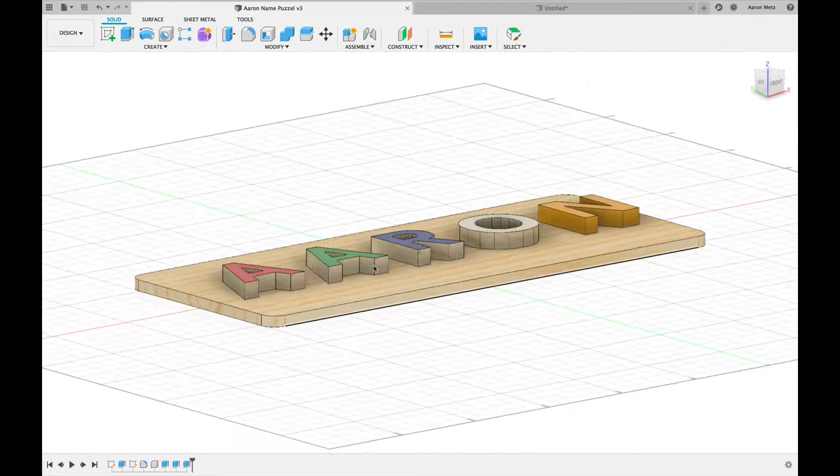Okay, designers, today we're going to look at how to create this simple name puzzle in Fusion 360. So ultimately, we're looking to output something like this.

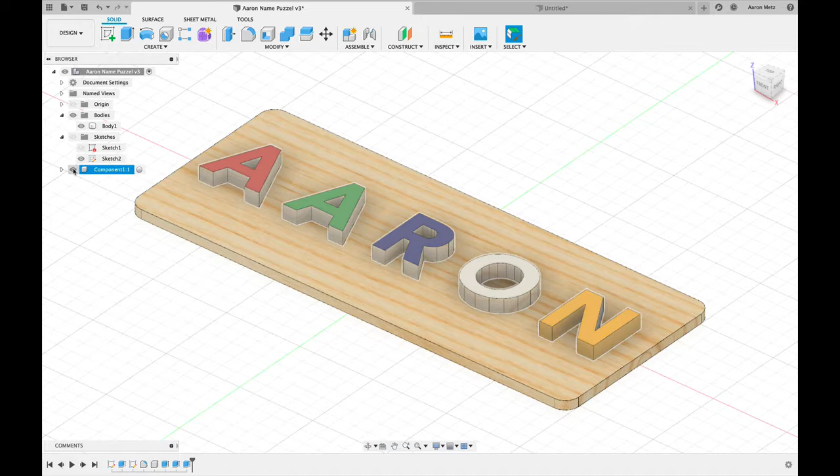If we look at it a little bit closer, we can see in the browser here that this model is made up of a component, which in this case is the actual letters. It's also made up of a baseboard where an outline of the letters has been recessed into the wood, allowing the learner to place the letters in the space. So let's look at how to create this.

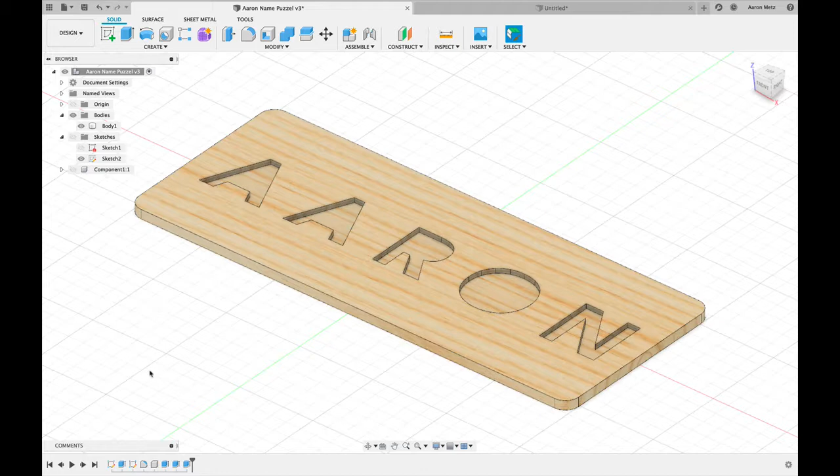Let's dive in. So I'm in a new sketch and I'm going to sketch here on the floor, as we like to say, and use a center rectangle.

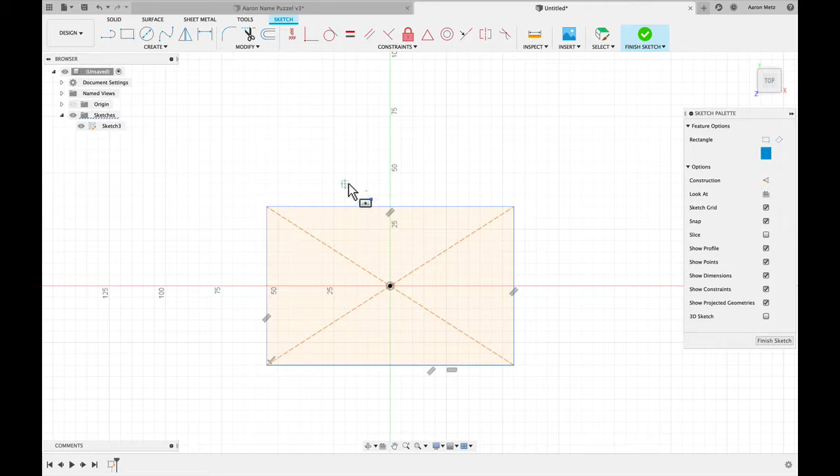Starting from the origin, I'll click D for dimension. You can see here that I am going to set the dimensions after the fact, using the dimension tool to do that. It's a very useful tool. So if you ever change your mind, you can just simply change the dimensions here and it will update your model. So we have a basic rectangle ready for the base.

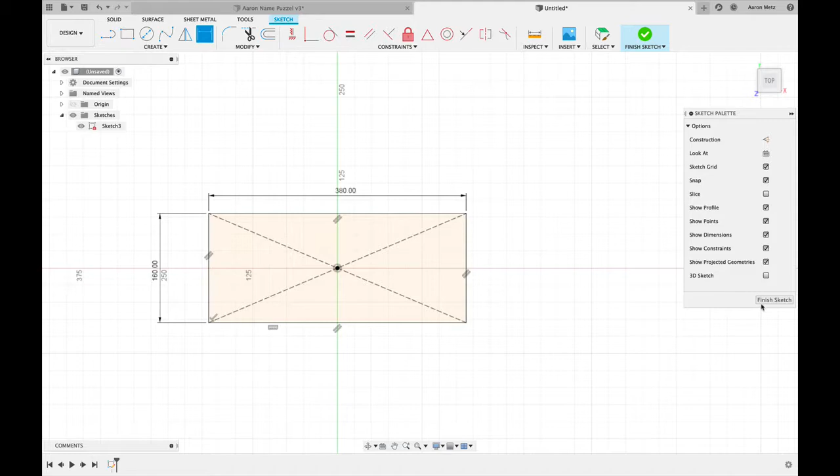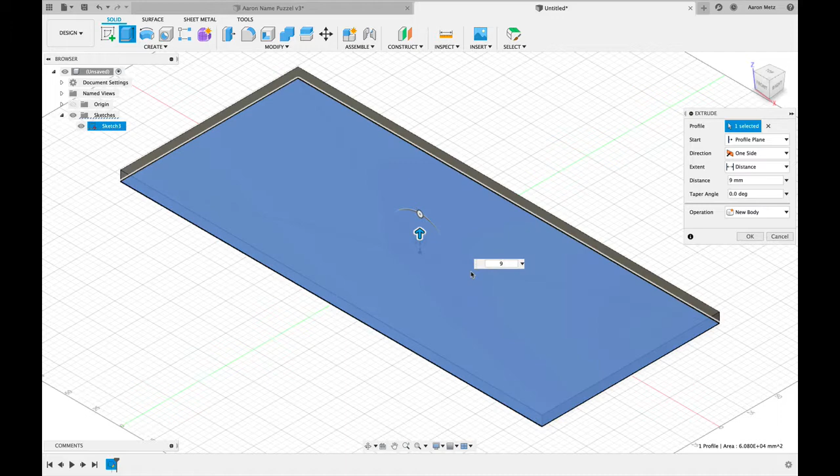I'll click Finish Sketch, move back into this profile view, and using the Extrude command, E, I'll extrude this up by the thickness of wood that we have available in the studio, and the thickness we'll design this piece for will be 9mm. So just tap 9, press enter, and we have now a piece of material.

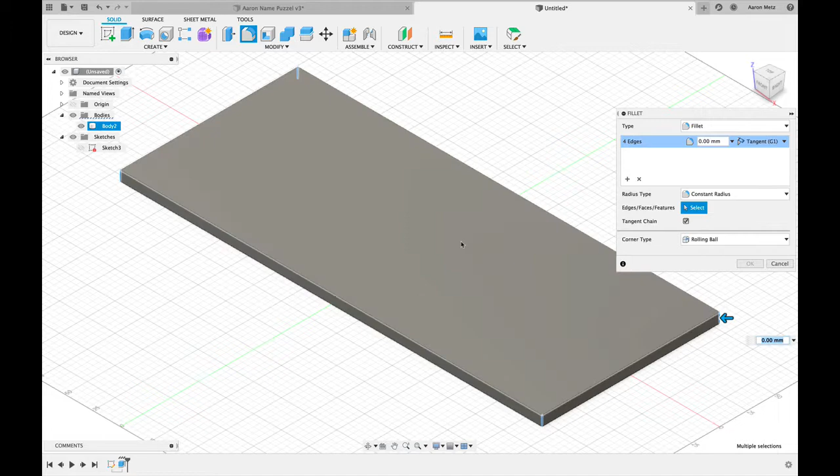It's a good idea to round off the edges, keep it safe. We'll use F for fillet, and then go ahead and select the vertical edges, and I'm going to put in a value of about 9mm just to give it a nice round edge.

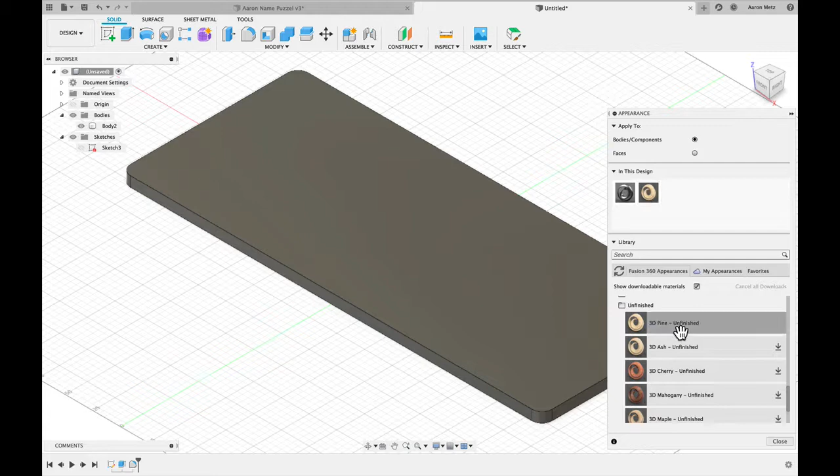I like to apply a texture to the model early, just so it gives you a better sense of how it's going to look in the end. So press A for appearance. As we saw in class, I've already bookmarked a wood material, pine. You can see it's available in my favorites. So I'm just going to drag that onto the model, and it gives it a nice pine appearance.

Okay, so far so good. Our next task is to create a new sketch on the surface of this object, and that's where we will spell out the name that we're going to use. So let's go ahead and do that.

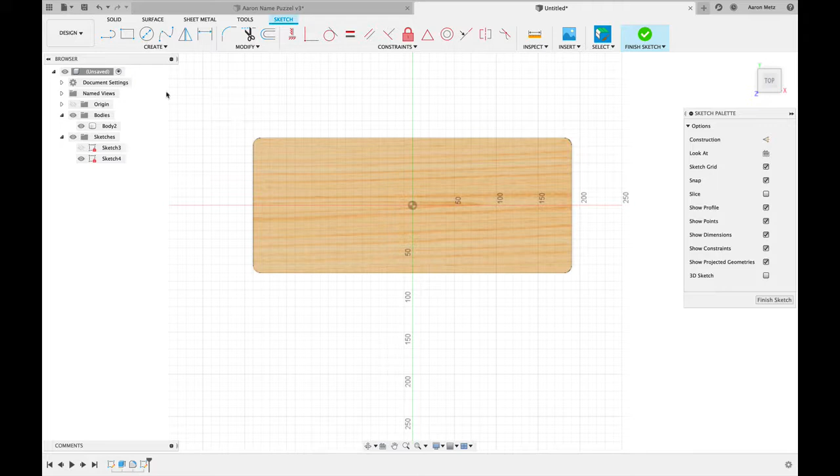Again, I'm going to click New Sketch. This time I will make sure I'm touching the surface of the object, and it's going to then bring me into this view, and it's waiting for me to create a sketch. The type of sketch I'm going to create is text.

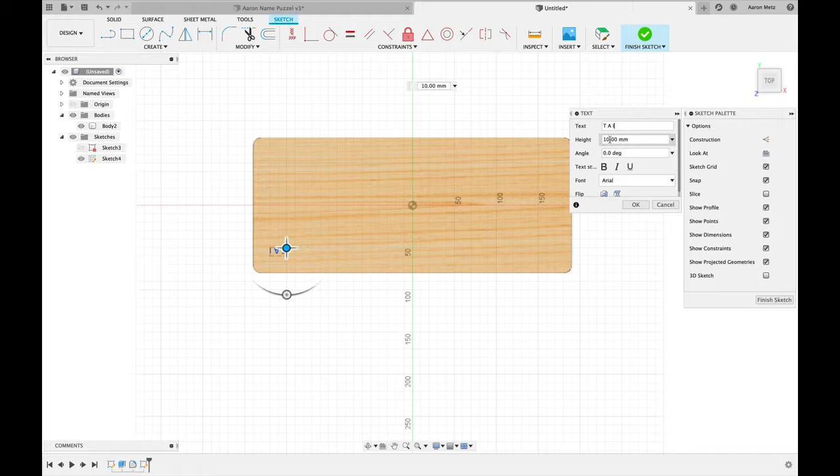I'll simply click text, then somewhere here I'm going to just click there and put in the name. I'm going to use spacing in the name, so I'll just put TAI — I'm going to design this for my son Tai — and just experiment with some different values of height so that it's going to fill the board.

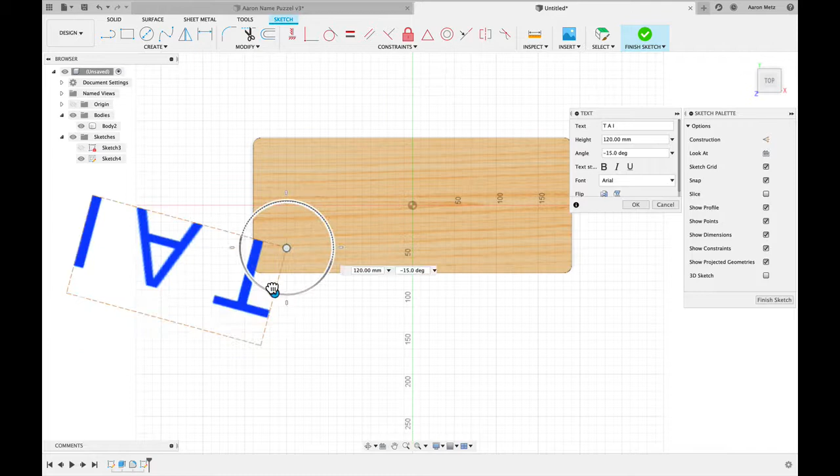So I've got about 120, and you can see the orientation is not set right. So you can either grab this little handle here and flip it around — obviously we want it 180. You could type the value in there, or you can also use these flip icons.

I'm just going to give it a little bit more thickness, and maybe even more with Arial Black as the typeface. And I'm pretty happy with that, so I'm just going to go ahead and click OK.

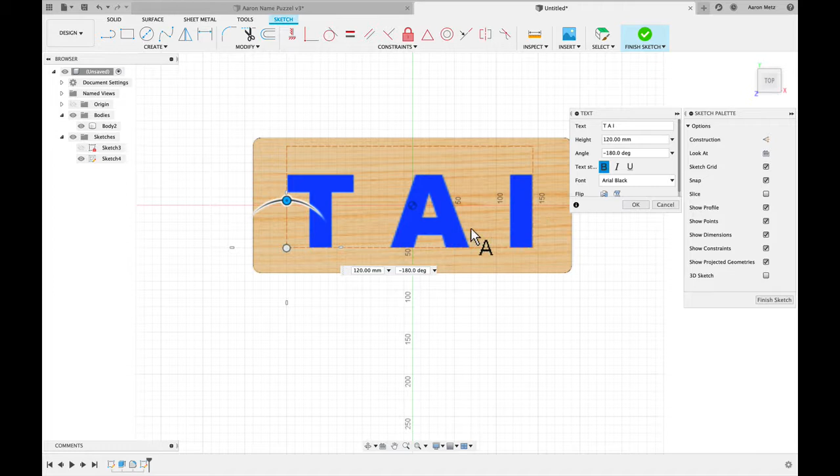Alright, so now I'm going to click Finish Sketch and check it out in profile view. So we have a name here, and we want to now do a couple of things. First is we need to tell Fusion that we want these letters to be treated separately.

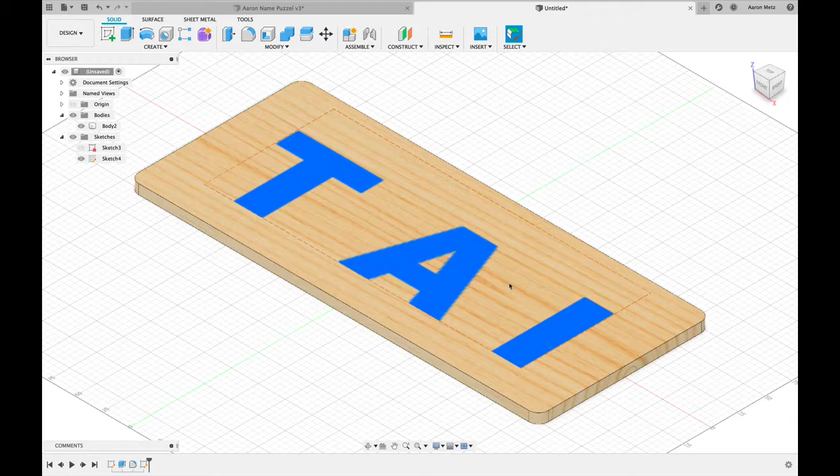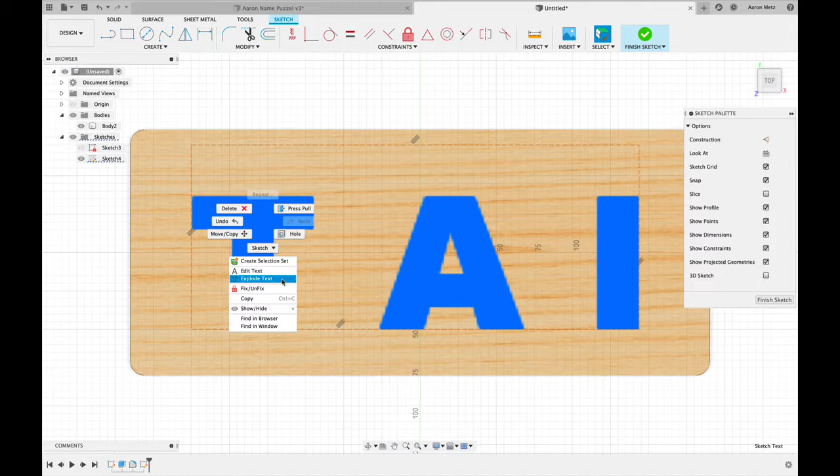So I'm going to right click over here in the browser on the sketch, and click Edit Sketch. Then I'm going to right click on one of the letters, and I'm looking for the option here that says Explode Text. Right now it's a flat image, and the explosion is essentially going to make each of these letters a separate entity. So click Explode, and you can see now that the outline of the letters becomes selectable.

Okay, that's good. So I'm going to go ahead and click Finish Sketch, and I'm looking for it to move back to this home view. That's what I want.

Okay, before I go further, you can see that at the moment this file is unnamed. It's saving in the background, but I'm going to force a save now. So I'm going to click Save, and it's going to ask for a name and a location. So I'm just going to call this Tai letter puzzle.

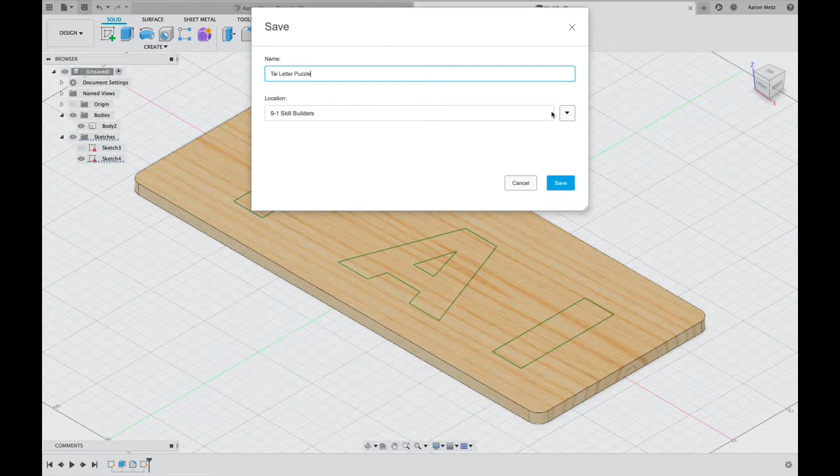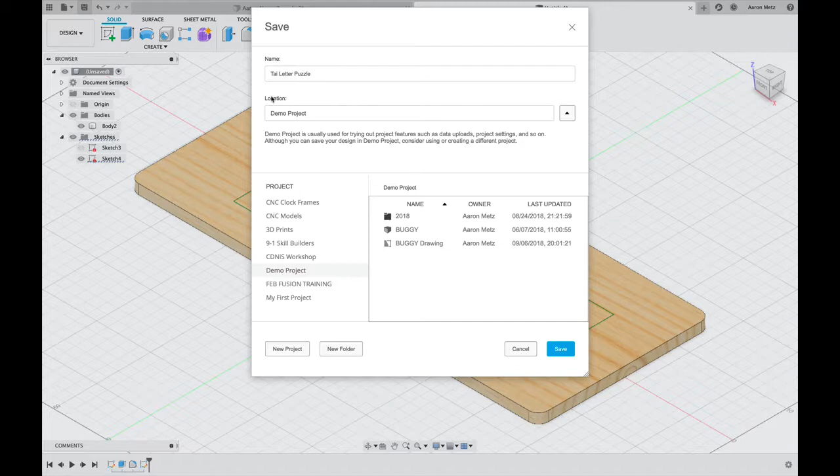For location, if you click the little dropdown arrow, I've already created project folders. One we have for our class is this 9-1 Skill Builders, which I've invited the class to. I've already dropped in there the example you saw earlier. I'm just going to leave it in the demo project folder for now and click save. This way, if there's a crash or something else happens on the computer, I feel like I have a nice version ready to work on again.

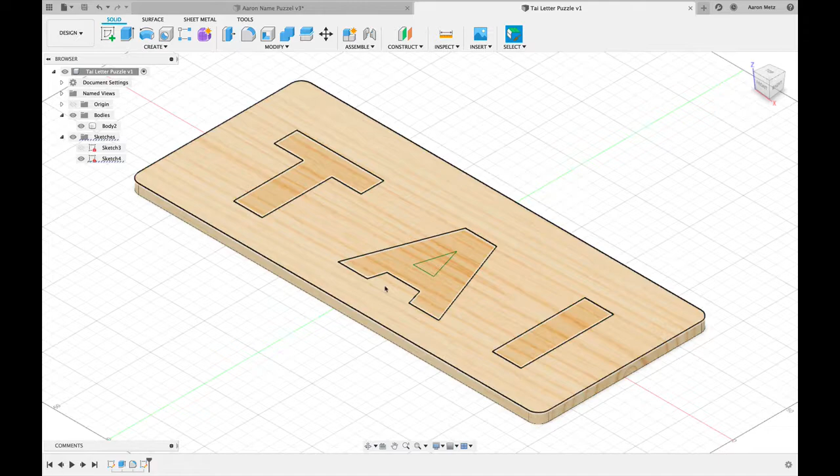So how do we then start to manipulate the letters? One approach I thought could be useful is to treat these letters as a separate component. To do that, we go up to the Create menu and select the Extrude command with E, and the window appears. What we're looking for first is the operation - what kind of extrude do we want to make. By default you'll tend to see cut or join as the default operation. I'm not going to cut or join.

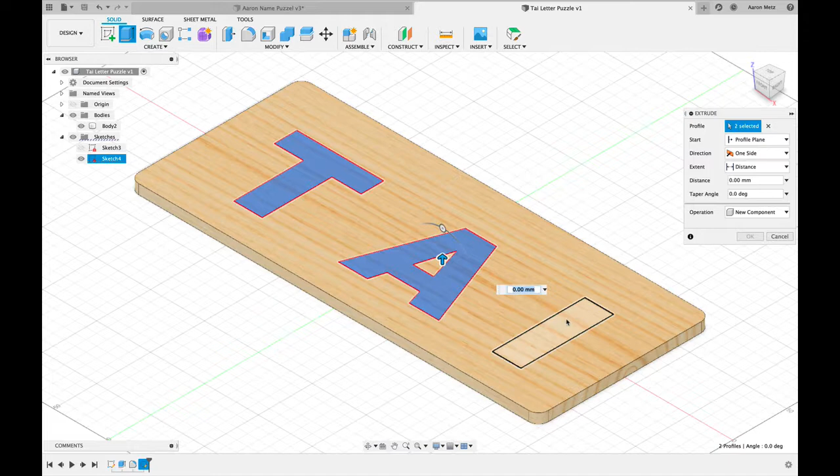What I want to do is, from the letters, create a new component. So I'm going to tell Fusion what I want to make a new component from. For the extrusion, I'll start pulling it up, but I know that 15 is going to be a good size extrusion for my lettering. So I'll type 15 and press enter.

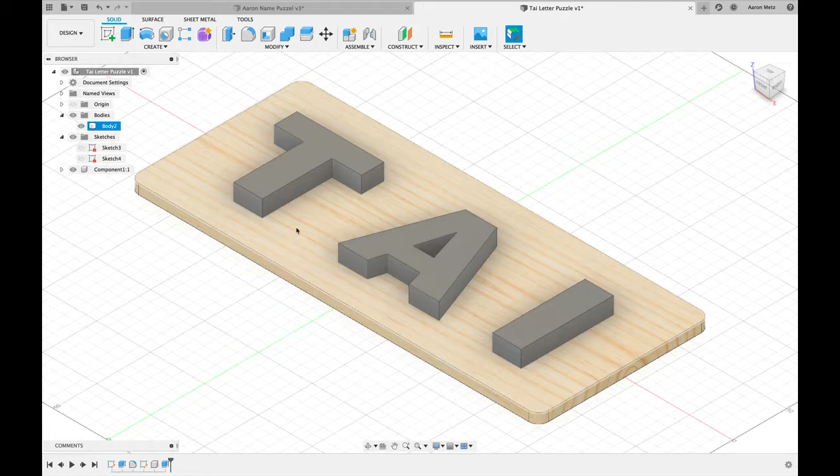So there we have some letters, but right now the letters are sitting flush with the board. We want a little recess so that the letters definitely fit into the board. You can see now a component has been added to the browser. What I want to do now is hide this component and make sure I can still see the sketch of the letters that were there previously - I'm toggling the visibility of that sketch.

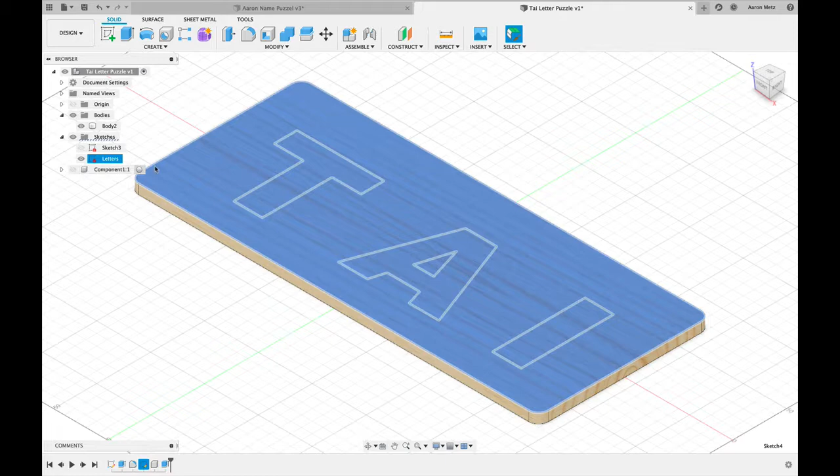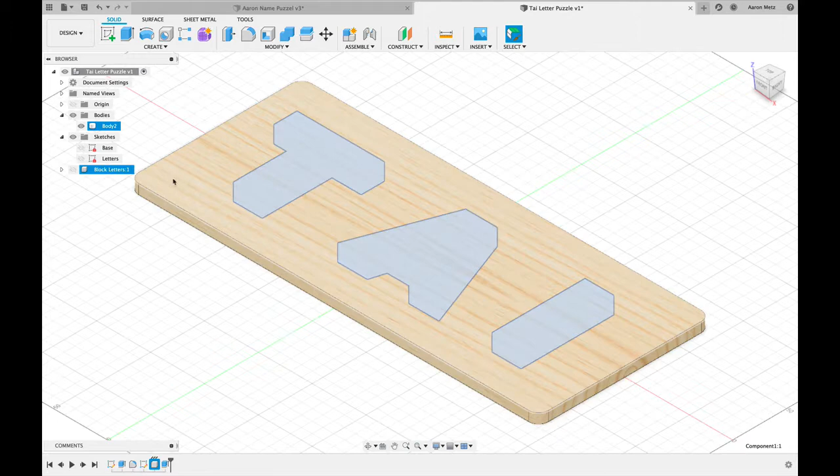It can be very useful to name your sketches and components. So I'm going to name the sketch letters so it's easy to understand. This sketch is the baseboard, or base is fine. And this component here I'll just call block letters. That makes everything a bit easier to understand.

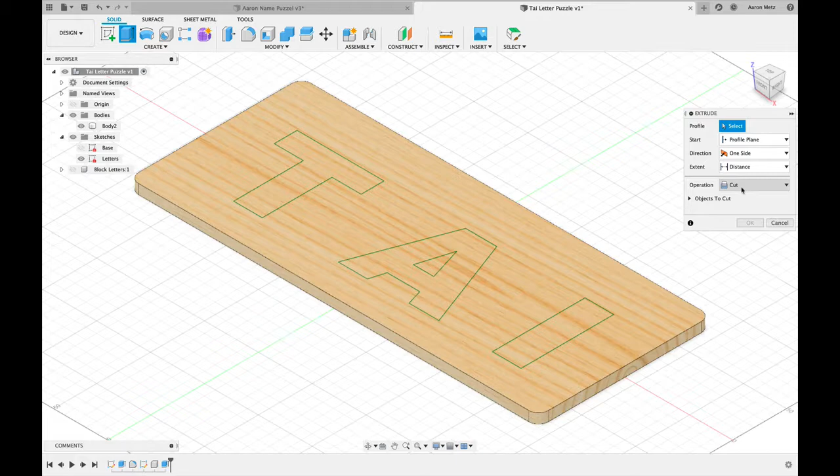So if I turn on the letters, what I want to do now is perform one more extrusion, this time negatively, so there's a little recess to place the letters inside. I'll press E for extrude, but this time the operation is going to be a cut, and I'll select those things I want to cut. For the value of the extrusion, I'm going to go down -3, just 3mm, press enter, and you can see I have recessed the letters.

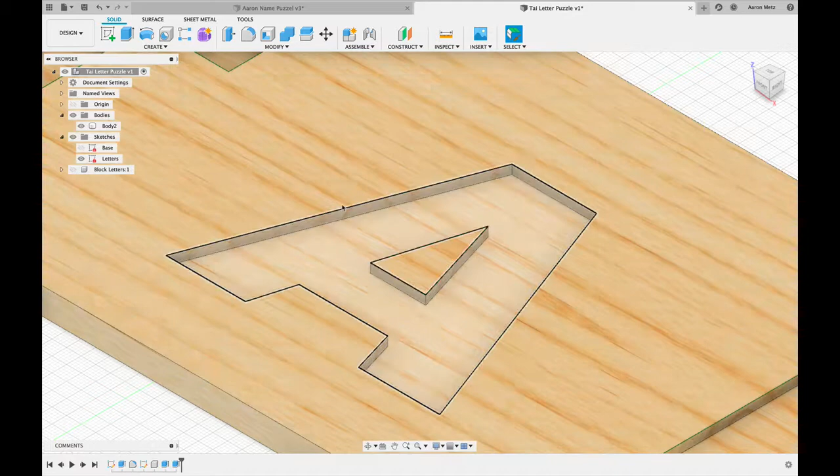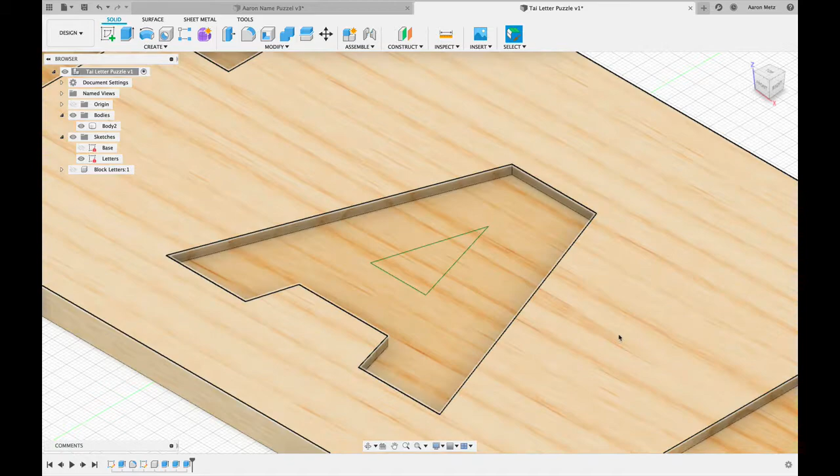Now, just to ensure a better fit for the letter A, I also want to extrude the center of the A so it's coming in a bit closer. I'll just repeat the action - for repetitive actions in Fusion, you can right click and choose Repeat Extrude. Again I'll make sure the operation is a cut, slide it in the direction I want, and type in the value -3. That way it sits at the same level as the extrusion around the outside. And there we have it.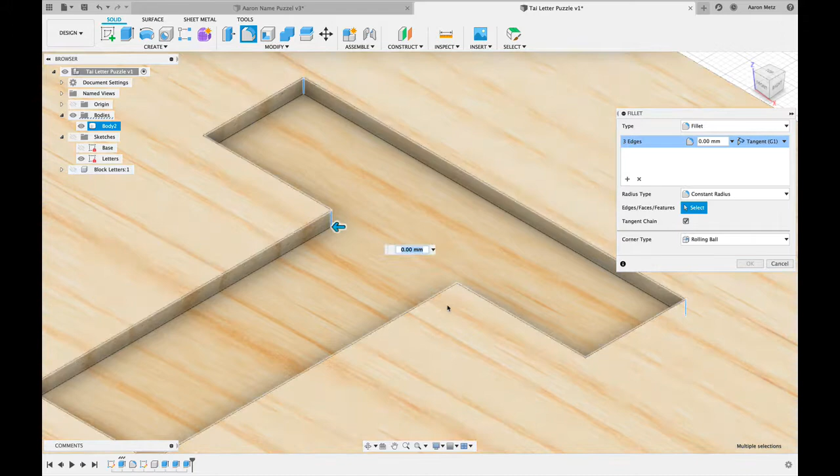One final feature - I would turn off all the sketches, and you might want to fillet some of these edges here just to make them a little easier for the block lettering to fit in. I'm going through, and I might give that, say, a 3mm fillet - you can see it's nice and rounded there.

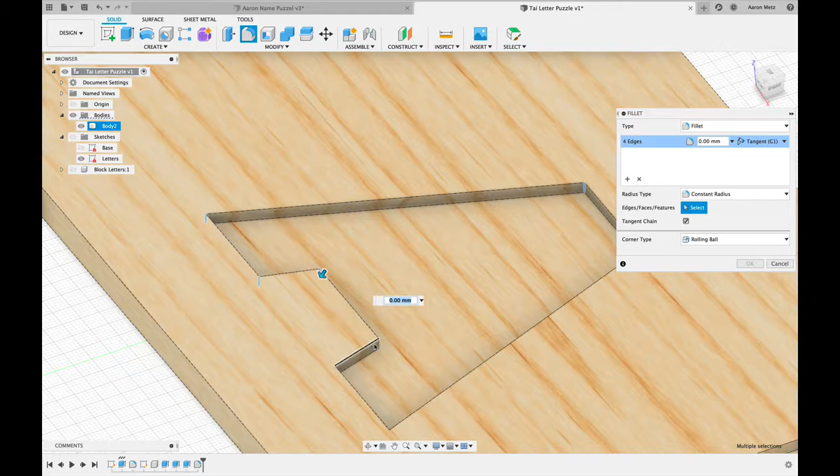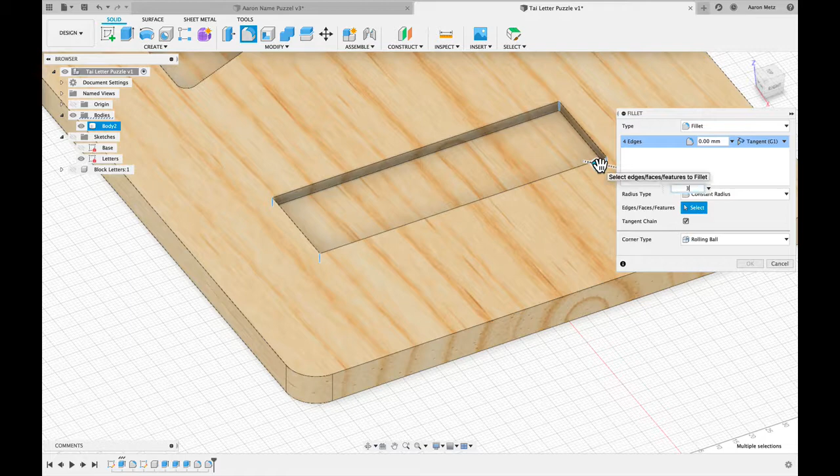So I would repeat those steps for the remaining recesses - just F for fillet, and go through all those vertical edges to make sure they are rounded up. Again we could right click and choose repeat, which is very useful. It's 3mm - I'm pressing 3, and then let's go back home. Okay, that's looking a bit better.

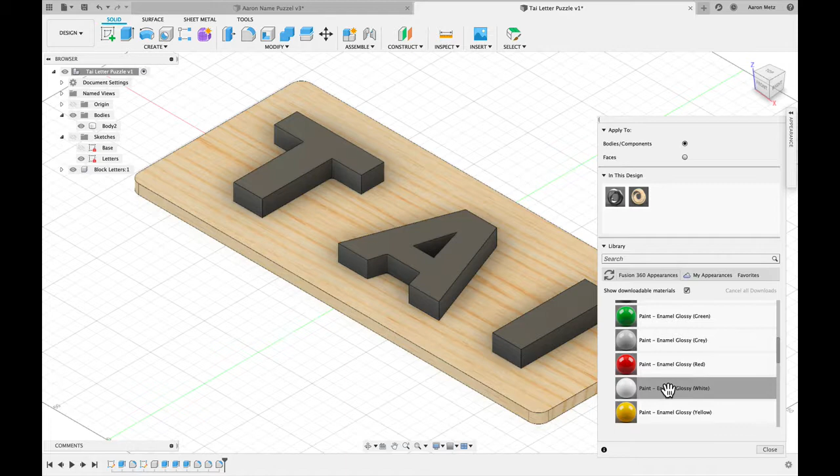Now I'm going to turn on the block lettering, and just for a bit of fun, I'll apply a paint scheme to the different letters. Here's some different paints under Paint Glossy. So I might give the T a blue, then give the A red, and the I green. Command S, just give it a force save.

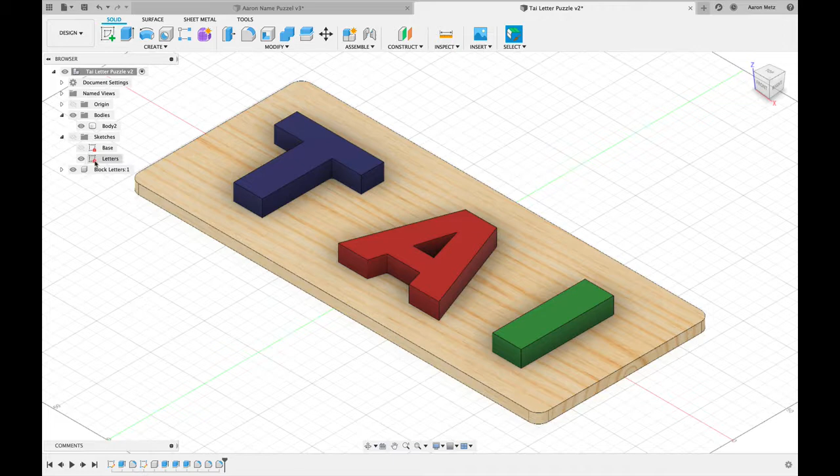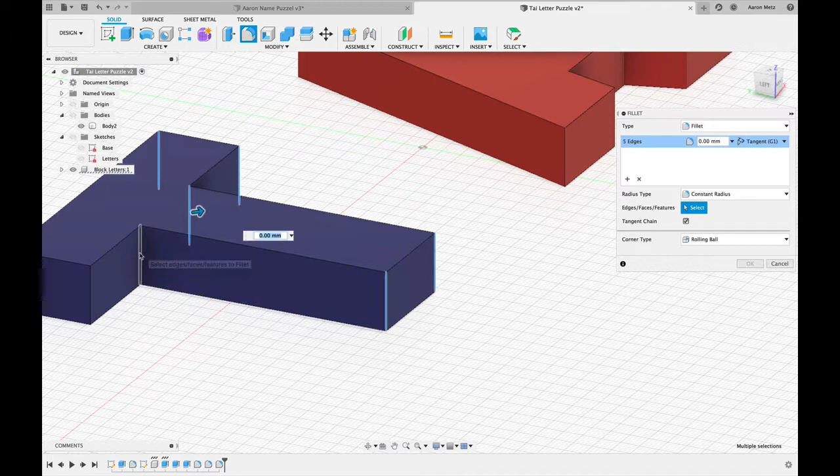I filleted the recess, but I haven't filleted the letters themselves, these components, so they won't fit very well if they are square going into a rounded edge. So I'm going to do that. Let's turn off this body here and get a bit closer. With the fillet command, I'm going to also fillet these edges so that they are the same as the ones for the recess. I used a 3mm fillet, and then I'll repeat the command for the other letters here.

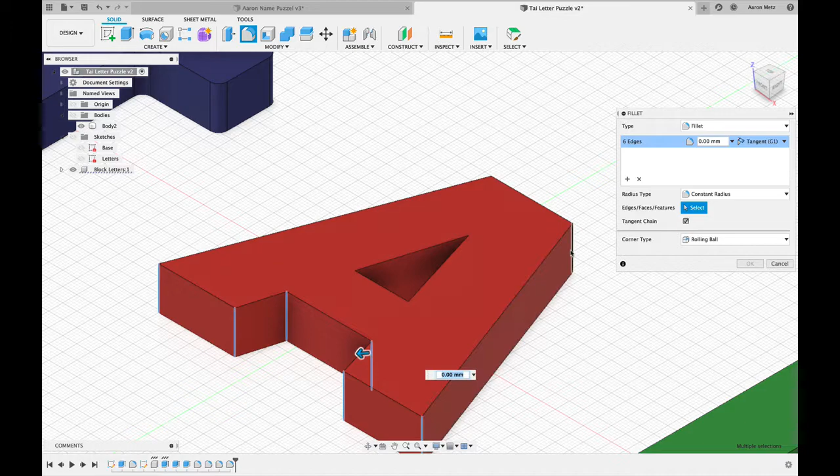And just going around, touching each edge - of course I'm using a mouse, and a mouse is definitely your best friend when it comes to using Fusion 360. I strongly recommend you use a mouse. So there you go, I've finished off that, and we'll head back home. Yeah, that's better.